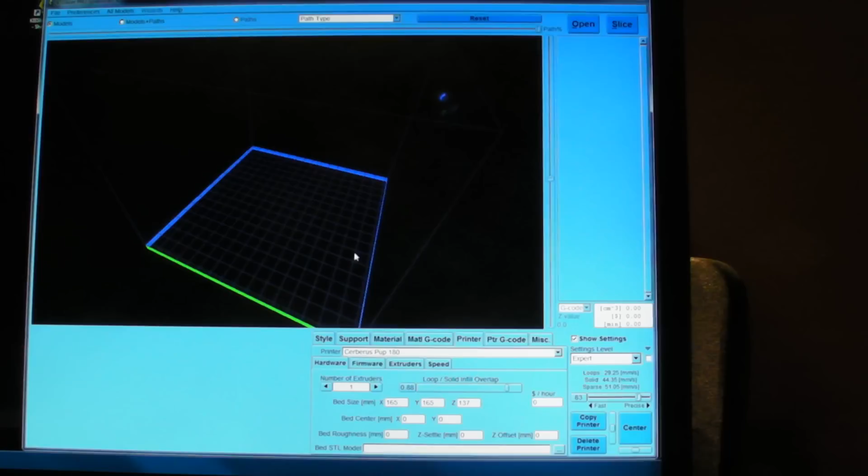In this video, I'm going to show you guys a little bit about how to use KISSlicer slicing software in a very basic mode. I'm not going to get into a lot of detail about the hows or the whys of the different settings. I'm just going to show you how to set it up to slice effectively for a Cerberus 250, a Cerberus Mega, and a Cerberus Pup as well. So let's get started.

So if you've got KISSlicer, I actually have the registered Pro version. It gives me a couple of extra features, but you don't really need to have the Pro version if you're just doing basic slicing. And we'll start with setting the printer up. So you can see at the bottom there's a number of tabs: Style, Support, Material, Material G-Code, Printer G-Code, and Miscellaneous. First thing I like to do is get the printer set up.

So normally you start with default, and at that point you can click on Copy Printer down here. It copies the default profile into a new profile and allows you to change the name. Once you've done that, you'll be able to type in whatever you want to name your printer. It doesn't have to be Cerberus, but in this case we're going to go Cerberus Pup 180, and that has one extruder. If you have multiple extruders, you can add them here.

And then I just give it the bed size, and I'm giving a bed size of 165 by 165 by 137. These are not hard coded to your firmware or anything like that. It's just basically to give you the outline of the shape on the screen. It doesn't give you a circular shape, but generally speaking, side to side is 165, so just round the corners off.

The bed roughness, the Z settle, and the Z offset are all set to zeros. And I like to do a 0.88 solid loop infill overlap, so your infills will basically touch the perimeters by a factor of 0.88. And if you roll over and hold your mouse on top of any one of these, it gives you a little bit of a description. It's actually kind of a nice little thing.

It's pretty straightforward. Loops always go from inside to perimeter as far as I'm concerned, except in special cases where you don't have any overhangs or outward sloping print surfaces. If you had loops going from perimeter to inside with a print job that was sloping, you'd print way out here first, then print in midair, then have to print closer to this direction. Basically your print's going to fail. So I always print from inside to perimeter. That way you get a perimeter, then another little layer out, another little layer out, and so on. It works a lot better.

And I always do De-String. You need to do De-String on these Bowden setups, because you have to release the nozzle pressure when you're doing travel moves. Otherwise you get a lot of stringing and blobbing.

So let's move on to support. I actually normally design all of my parts so that I don't have to have any support. Every once in a while you can't get away with that. So I typically keep it on dense, and then I just change the support degrees.

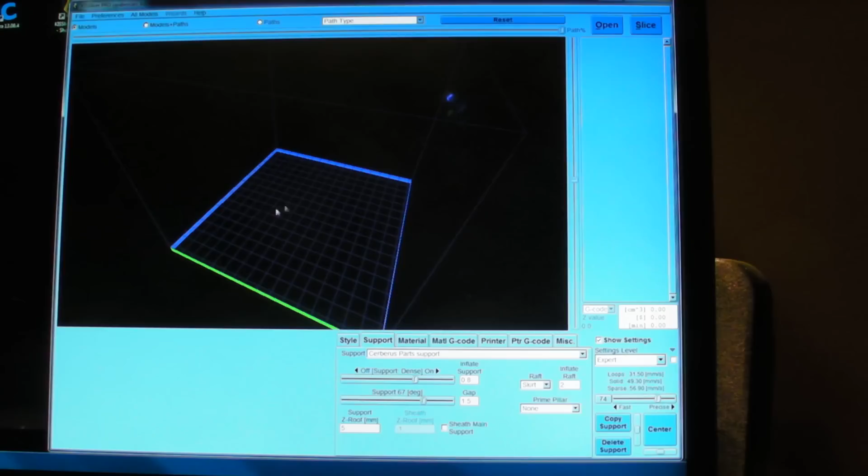And what the degrees is, if you have any object—I should load something up here. Let me just drag something in here. Let's see here, come on. Why is it not? There we go. Okay, so it's a drag and drop. You'd find an STL file and just drag it into place. You can see this is one of the corner brackets for a Cerberus Pup.

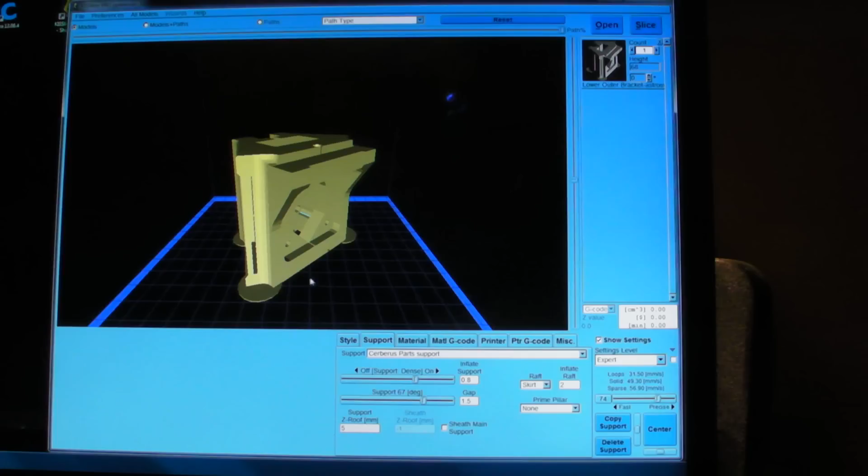And you see this little overhang here. If you were looking at the plate, there's absolutely nothing between the plate and those lines up there. And you're like, well, that needs to have support in there. Well, actually, I don't print them with support because the Cerberus Pup can basically bridge that without needing any support, which is kind of nice.

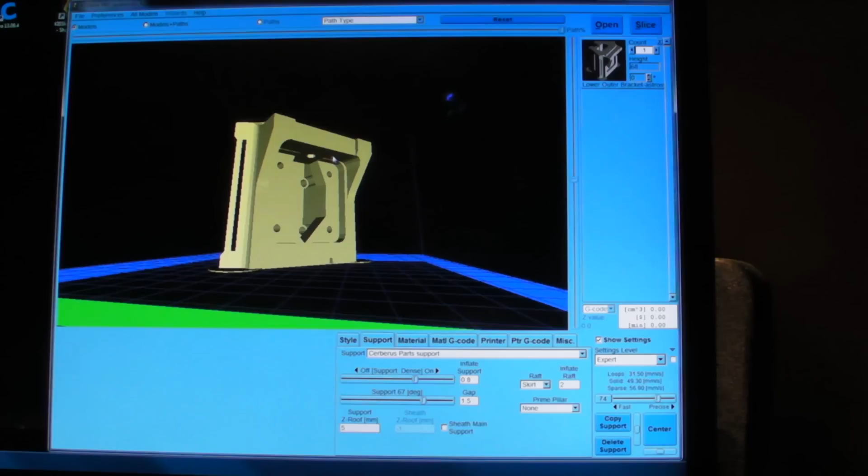But if you did need support, that's considered a 90-degree support straight across, so it's 90 degrees off of vertical. Now, if you wanted a support to come along this little angle over here, something like 60 degrees, you would have to set this to just under 60 degrees so it would read that you want support on something at 60 degrees. And you can keep going down to 45 degrees and so on. You just have to experiment with that.

The other thing is the support Z-roof. No support will be generated above this height. So if you have a product that only needs support for the first couple of layers, or there's something down there that you really want to have a nice opening that's supported well, you can say after 5 millimeters, don't print any more support, and that's going to stop printing support at that point.

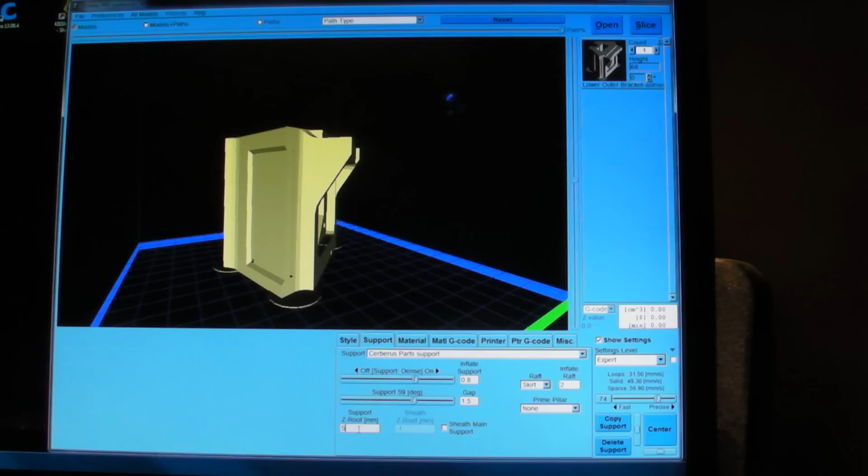I like to print a skirt around the print. So if you look at this from the top view, a skirt basically, on the very first layer, just runs a bead of filament around. It's extruding an initial bead to get the extrusion primed and operating correctly. It's just a good idea to do that. And I inflate it 2 millimeters beyond the edge of my print.

Let's move on to material. Every material is a little different. And I actually print almost exclusively in black PLA. I kind of like the black PLA, it's good stuff. I use SainSmart or ZenTool Works. There are a lot of other really good brands out there.

But this particular brand of PLA, you have to measure every roll of filament you get. You got to get a calipers, and measure it in multiple places. This one averaged out to 1.74 millimeters, and it prints really well at 195 degrees. It's trial and error on every single one—you have to just print a test piece every time you get a roll of an unknown filament. You got to do that.

So the De-String—remember over here on the style, I had the De-String checkbox. Well, over here under material, you can do different D-strings for every single material. Remember, you can start with a default material. You hit copy material over here, and you can basically give it a name, black PLA, white PLA, ABS, etc.

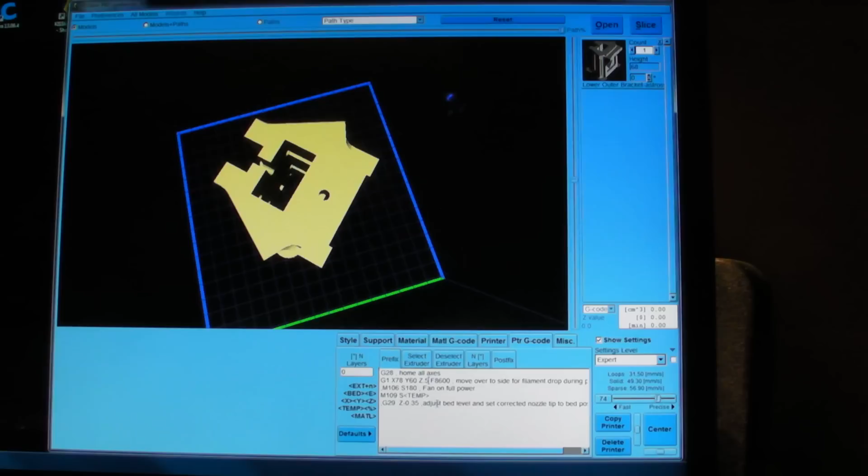I do a home, and then I make the nozzle move down and off to the side of the bed, right down against the edge of the glass before it does the preheat. Then the nozzle will heat, and a little bit of filament's going to just come oozing out of the tip. I've put it down there at the edge of the bed, so as soon as the print gets going and the platform moves to start the print, the little piece of filament gets hung up on the edge of the glass, and it gets cut off.

That way you're not dragging a little piece of filament around with you that might get caught up in your print at some point.

There's actually a little semicolon right there. This is the method for commenting things out in G-code. You put a semicolon in front of it, and it will not be read by the interpreter.

The next line is an M109, which is heat the extruder and wait. There's also an M104 command, and you can sometimes put that at the beginning after the G28. You can set M104, which is heat and continue. But in this case, it gets to that corner so fast it doesn't matter.

So M109 and then S, and then this bracket temperature end bracket, that basically gets replaced by the first layer code you've set for your material. In the printer G-code, that bracket temp is a special code that reads in the temperature for whatever material you've got set up. So don't hard code that to some temperature—let the material set the temperature for it.

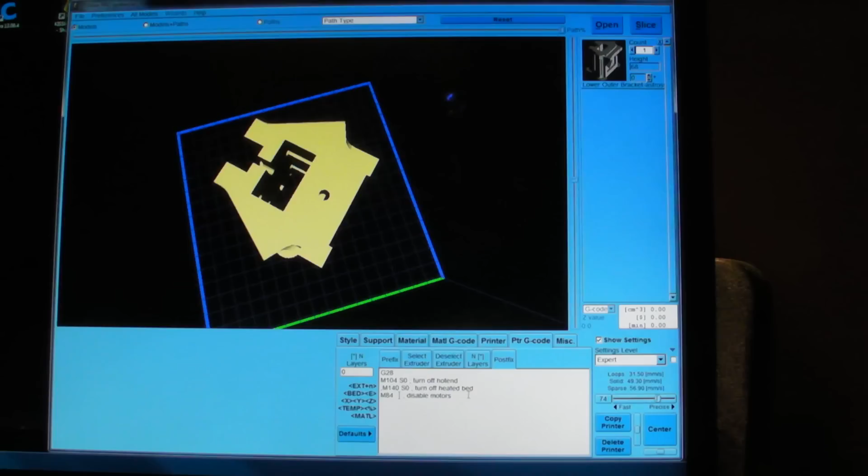M104 S0 sets the temperature to 0. M140 turns off the hotbed, which we don't have, so that should actually be commented out. And then M84 disables the motors, and that's the end of your G-code. That's all you got to do.

I wouldn't worry about that stuff. I don't think you can set any of this up if you don't have the Pro version of KISSlicer. But once you've got this set up, you can come up to the top and hit the slice command.

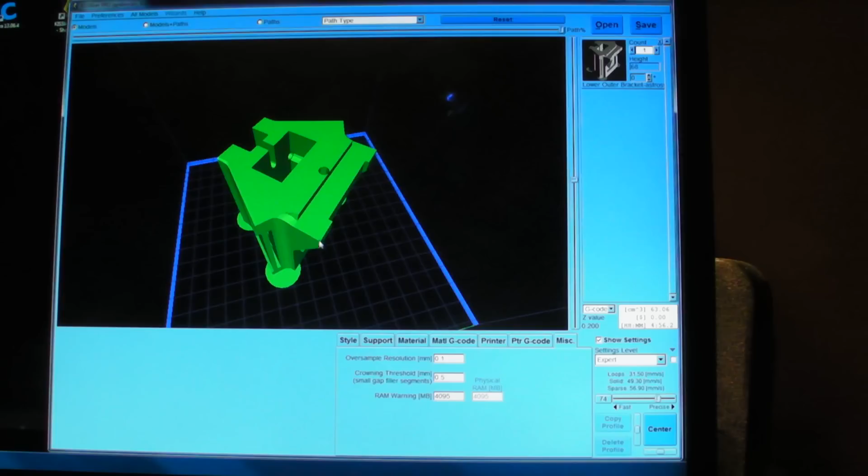Now, I have a really high-end video card on this machine, and for some reason the preview doesn't show up. I got one of those workstation class cards for my SolidWorks. So it looks like it goes blank here, but on most computers and all my other PCs, it'll show you a little progress as it goes through, and it's very, very fast, much faster than Slic3r. It just blows almost all the other slicers away as far as speed.

Once you've sliced it, it changes color, and then you can click on these buttons across the top here, models and paths. It gives you a very faint outline of your model, and then shows you the path. That's the first layer, and you can see that's the prime, that's the raft, the skirt, and it's 2 millimeters out. You can see that yellow line going around right there.

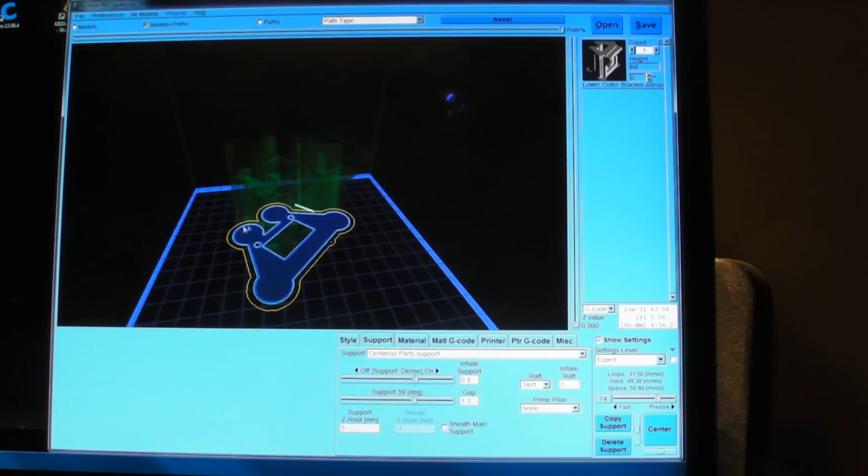And you can scroll up and you can see that I have a 33% infill. I'll show you the infill in a little bit here. But you can see this part's all set up, and it's going to slice real nice.

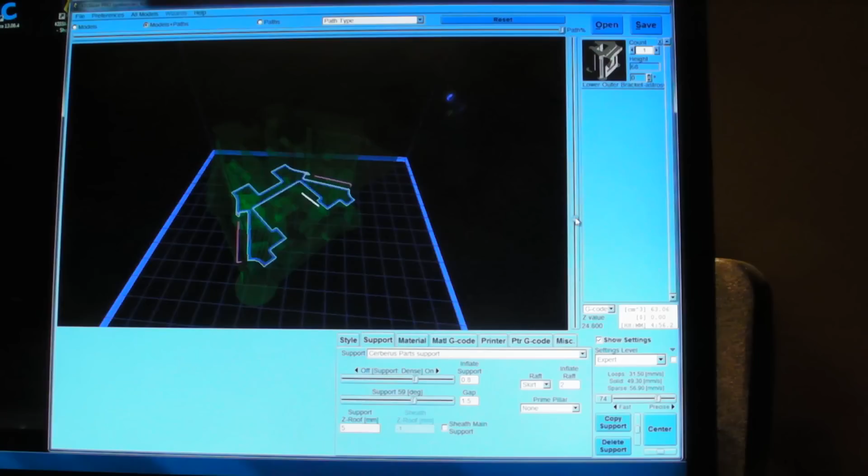But you should definitely look for overhangs and things that suddenly appear in midair that shouldn't be there, like there. See how it's totally open here, and then the next thing you see is that layer right there. Well, luckily it does this perimeter first, and it basically bridges that whole thing, and then it comes across and infills that whole thing.

And the reason that works, as far as I can tell, is under printer, under hardware, I've got the loop to solid infill overlap set to 0.88, and that allows the nozzle to come and touch the filament as it comes across right there. Anyways, that's how that works.

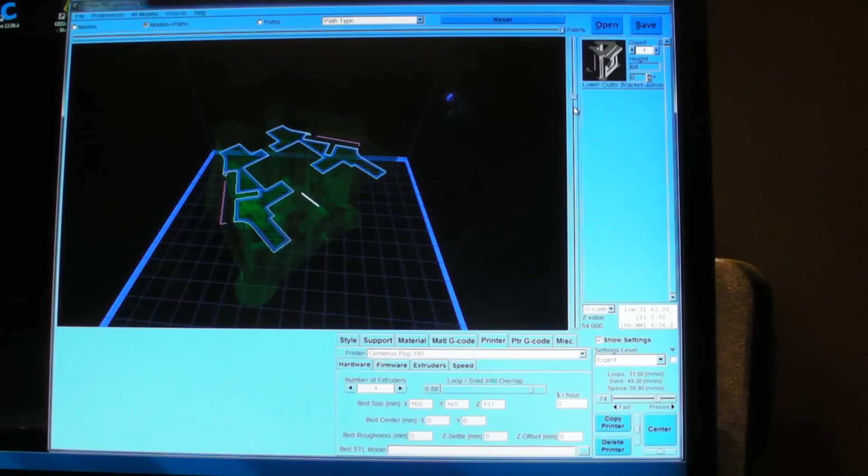And if you drag this slider all the way back down to the bottom, it'll actually show you the entire G-code in slices like that. It's kind of cool to look at right there.

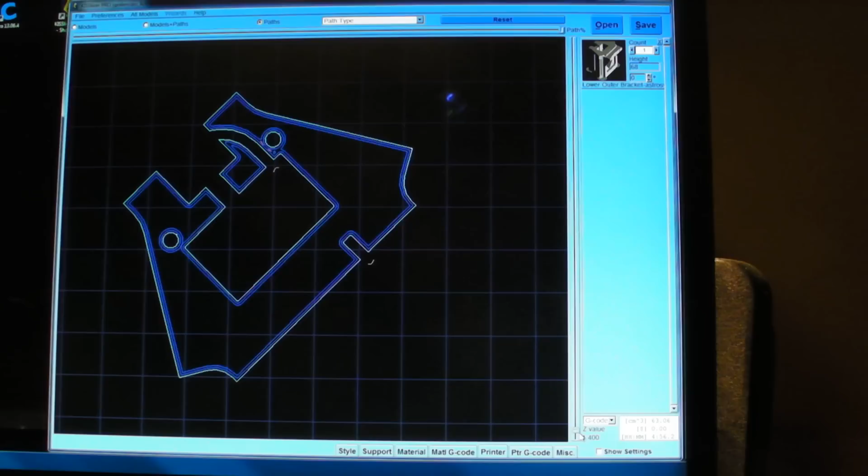And then finally, you can also turn off the show settings, and you can go to paths, and this shows you from a top view. And then you can really get close in there with your observation of the G-code. So there you go, that's what you're looking at.

And once you've verified you like it, you would hit save, and you just basically save out your G-code to a known location, and then you're ready to go over to Repetier Host and open that file up. I guess we can do that right now.

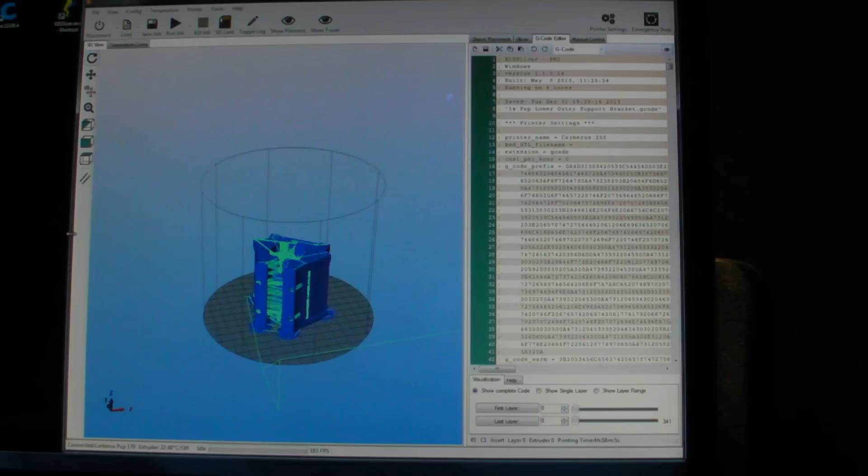Minimize that. Here's Repetier Host, and we're already connected. I'm going to hit load, and here's a bunch of stuff that's already been sliced. You can see it's a G-code file, and we're going to open this thing up, toggle the log, and I'm going to zoom in a little bit here.

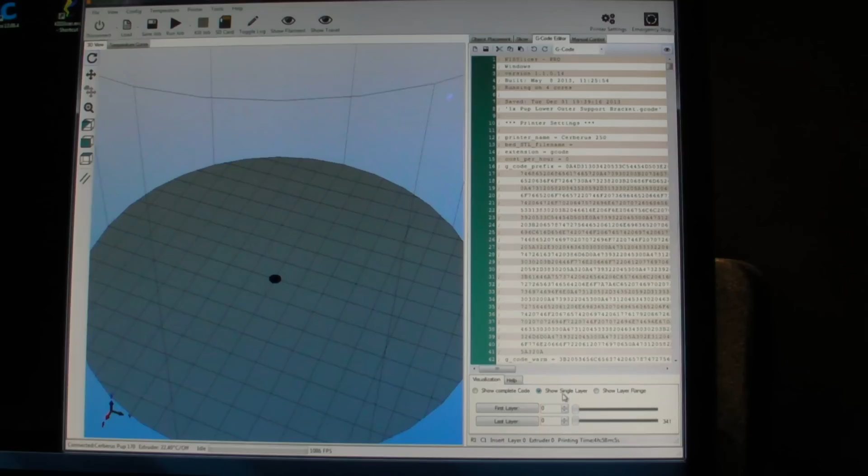Move around so you can see what we got. That shows you all the travel moves, which can be turned on and off up here. The filament can be disabled on and off here. And then at the bottom right hand corner, you can say show single layer or show layer range, which is kind of nice for just observing how the layers are going to run up.

You can do a show layer range as well, and you can drag the slider like this, so that'll show you basically a layer range.

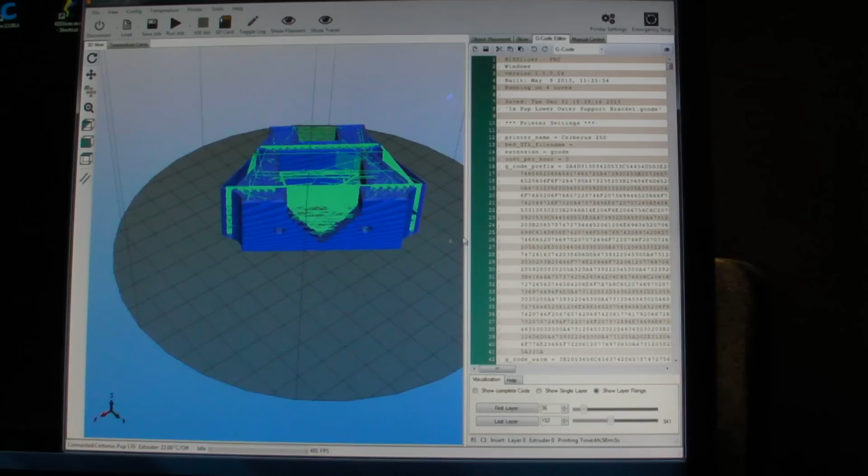This is the G-code editor window. You'll see it says G-code right there, and this is the G-code that we've loaded. The first long while gives you all the information about the settings that we've got set up, and then you come on down and it changes color.

Then here you can see the M104 S200, G28, and then it moves to there, etc., etc. And then this is all the G-code itself.

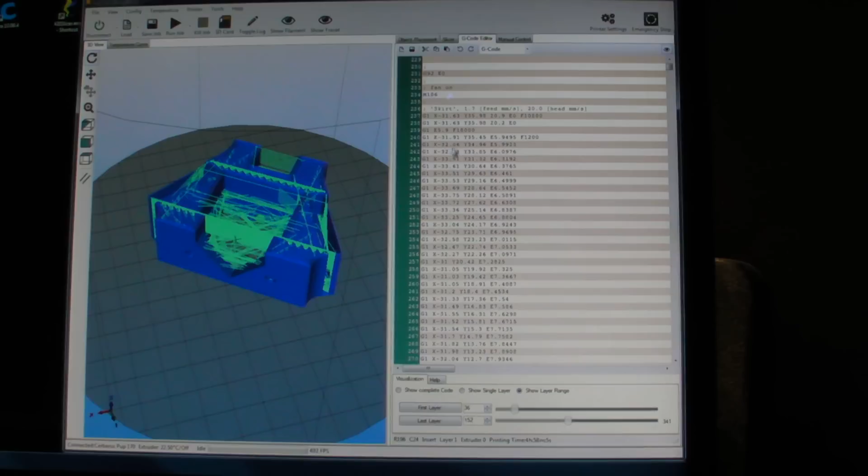Now, if you did show single layer, and we went down to the first layer like this, what's kind of cool is if you have this little eyeball, there's a little auto update preview over here, and then if you start to highlight this, just watch—you can actually watch the G-code being printed out here.

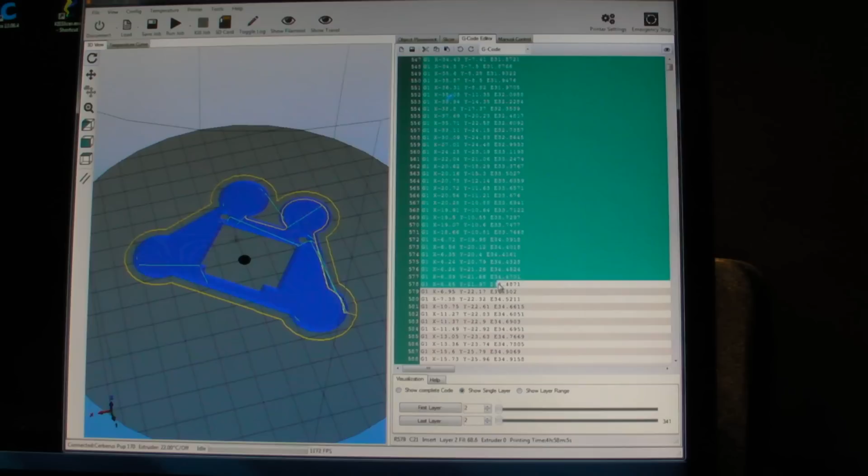So if you need to find something, if there's something wrong with your G-code and you just want to come in here and make a quick change to it, you can just come in here and change it that way.

All right, and that concludes our KISSlicer into Repetier Host G-code generation. Thanks for watching.